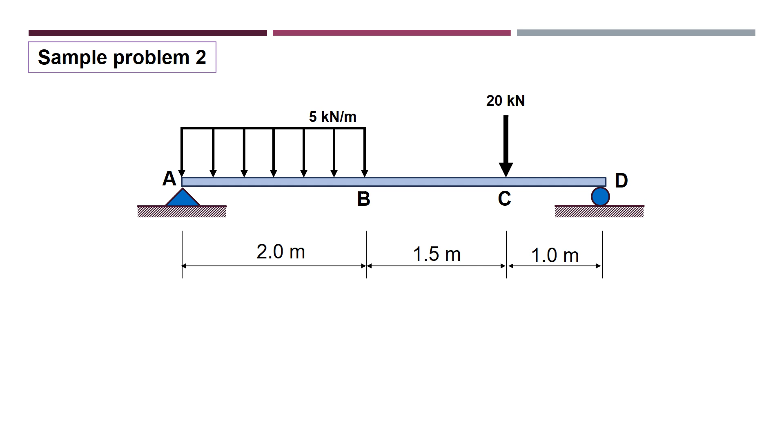So first step is to solve for the reactions at the supports. So kahit walang value yung X component sa hinge support, kailangan papakita pa rin natin yan doon sa pag-solve natin ng reaction. Like for this one, and in our first problem, you have the vertical component ng reaction sa A. Although 0 yung horizontal, sinama pa rin natin dito.

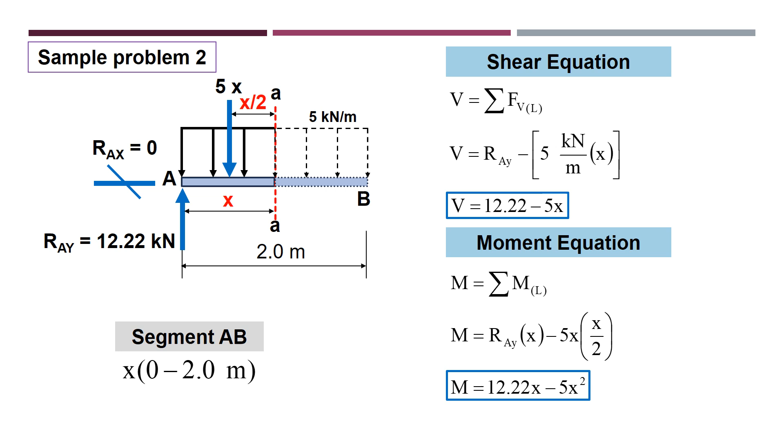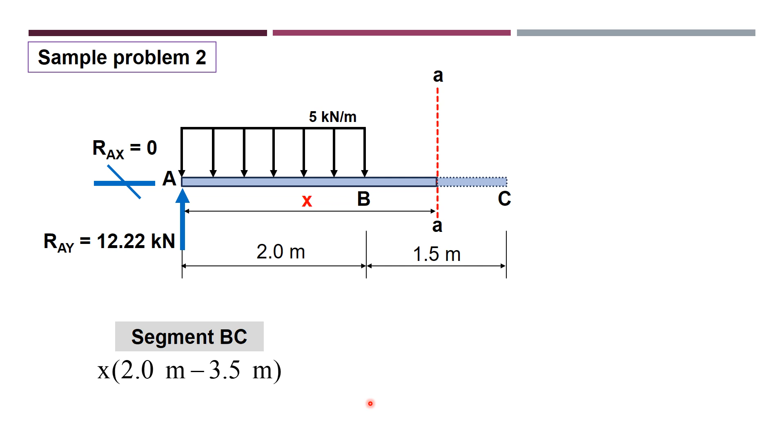So this is again our original beam, and this time sa segment BC naman, we pass an imaginary cutting plane through BC, measure the distance from A. So this is now segment BC, and for segment BC, the limits are from 2.0 meters to 3.5 meters.

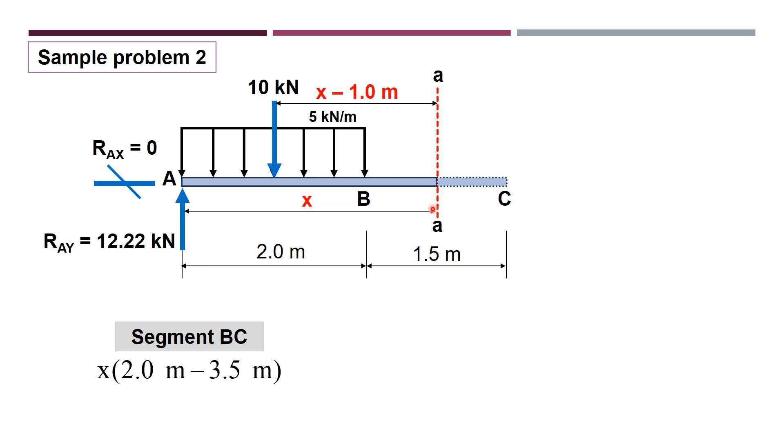So how did we get this one? Since this is a rectangular loading, ang centroid nito ay midway lang or nasa gitna. Or if this is 2 meters, it is 1 meter from A and 1 meter from B. And since what we need is the distance from this centroid up to the imaginary cutting plane, that would be x minus 1 meter.

For the shear equation, we'll sum up the vertical forces to the left of the imaginary cutting plane. Again, the vertical forces involved are RAY and the 10 kilonewton force. And simplifying, our shear equation for BC is V equals 2.22.

And for the moment equation, the forces that will rotate about this point will be the RAY, or the vertical component of the reaction at A, and the 10 kilonewton force. And these are their moment arms. So yung summation of moments to the left of the imaginary cutting plane, we will have

12.22 kilonewtons in clockwise direction with moment arm of x, and 10 kilonewtons will rotate in counterclockwise direction, so that's minus 10 multiplied by its moment arm of x minus 1. If we simplify this equation, we will have the moment equation for BC: M equals 2.22x plus 10.

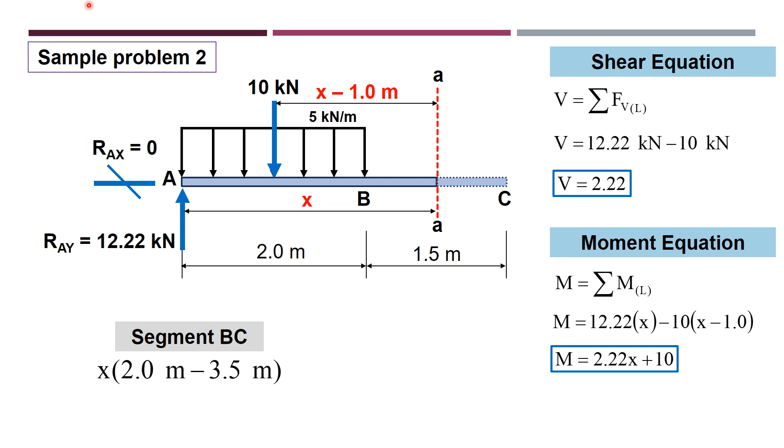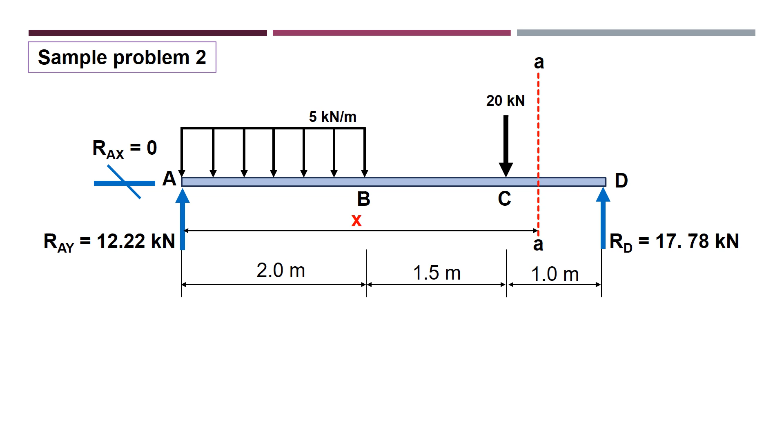And for segment CD, pass an imaginary cutting plane, measure that from A. This is now our FBD for CD, considering the left side of the cutting plane. Our limit now is 3.5 to 4.5. Again, uniformly distributed load ito, you need to get the equivalent single force or the resultant by multiplying 5 kilonewtons per meter by 2 meters, and it is located at 1 meter from either side of this segment.

So these will be the forces na nasakop ng x. We have RAY, we have this equivalent single force nitong distributed load, and the 20 kilonewton force. So tatlo na yung vertical forces. When you sum up, 12.22 minus 10 minus 20, or V equals negative 17.78 kilonewtons for the shear equation for CD.

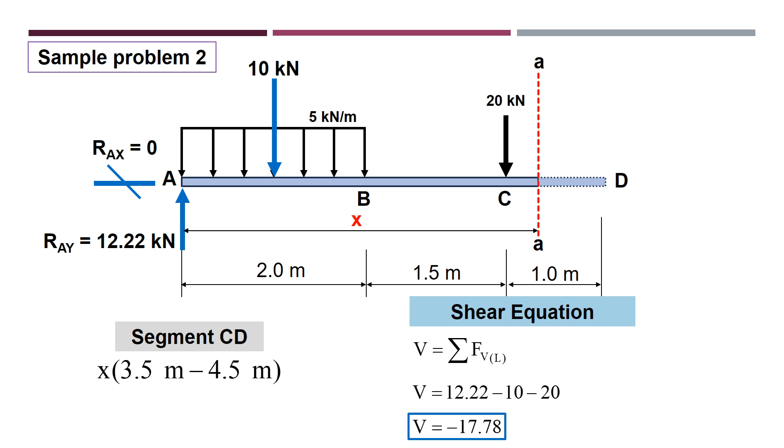And for the moment equation, of course, you need the distances of the other forces kasi ito may distance x na yan. So for 10 kilonewton, since this is 1 meter from A, at ang kailangan mo ay distance to the imaginary cutting plane, that will be x minus 1. And for the 20 kilonewton force, we have x minus 3.5 meters.

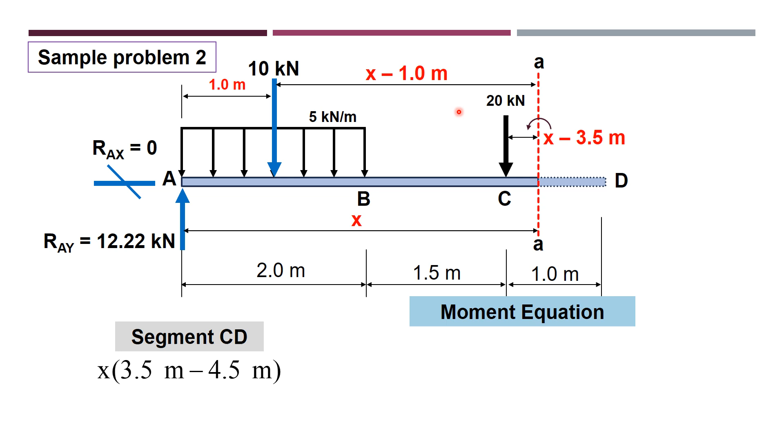So for the moment equation, 12.22 is clockwise with moment arm of x. 10 is counterclockwise with moment arm of x minus 1. And 20 is counterclockwise with moment arm of x minus 3.5. So simplifying this, we have M equals negative 17.78x plus 80.

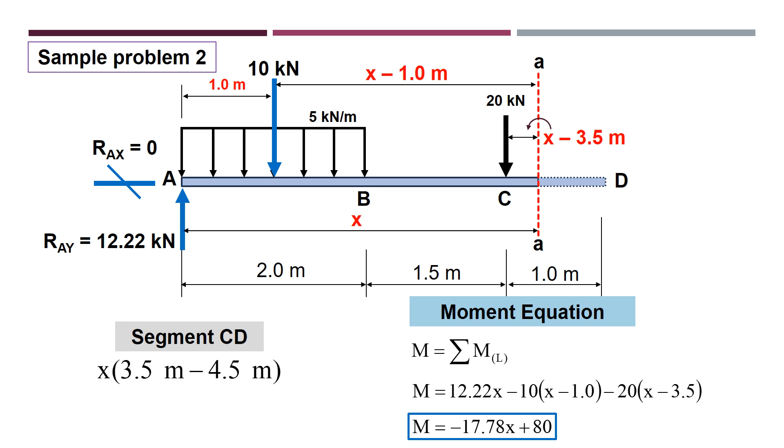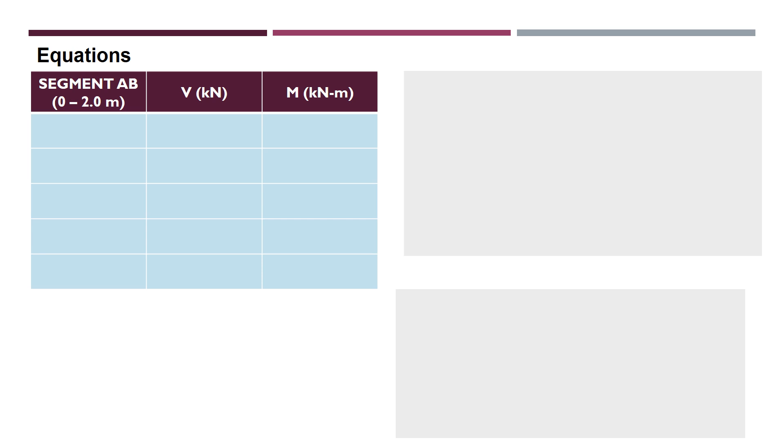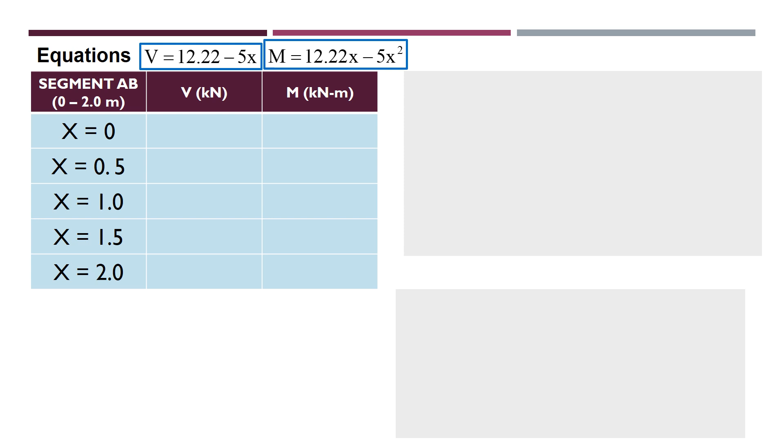So now we are going to substitute the values of x using the shear and moment equations for each segment. Ginamit ko rin ulit ang 0.5 meter increment. So for segment AB na may limit na 0 to 2.0, ang x values start from 0, then 0.5, 1.0, 1.5, and 2.0. Using the shear equation and the moment equation, find the values for the corresponding x. So these are the values for the shear and the moment.

Hindi ko na diniscuss isa-isa kasi alam ko naman na nakukuha nyo na yung procedure or yung technique kung paano natin makuha ang shear and moment values at each point considering the distance x. You will just have to substitute the value of x sa shear equation and moment equation para makuha natin lahat itong values na ito.

The same for segment BC na ang limit ay from 2.0 meters to 3.5 meters. And with this equation, these are the shear and moment values. Since dito sa shear equation natin walang variable x para mag-substitute tayo ng x distance, the shear values are the same at these points in segment BC na may distance na x equals 2.0 or 2.5, etc. While for the moment, since may x variable tayo dito, pwede tayo mag-substitute ng values na ito for the corresponding moment values.

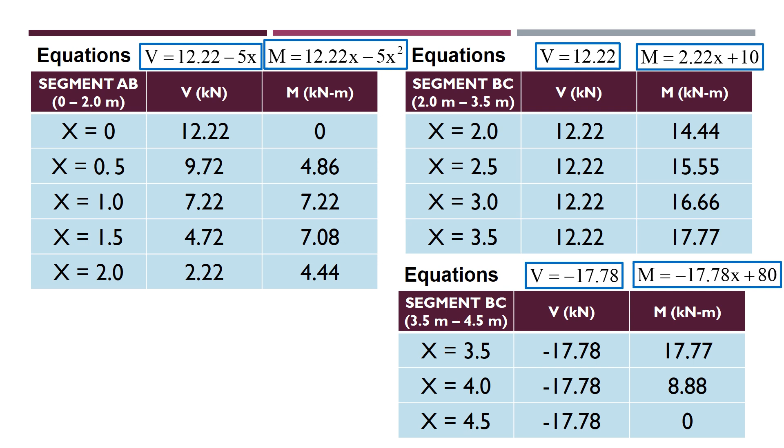So this is now our beam. What you will do when plotting the values, you draw a line parallel to the beam, one for the shear diagram and the other one for the moment. Dito nasabay ko lang na mailagay, pero you can do it na gawin mo muna yung shear diagram bago ka gumawa ng isa pang line para sa moment.

And also, using the increments of 0.5 ay discretion ko lang yon, but you can use other increments, like for every 0.2 meter, although masyado ng maraming points ang magagawa mo dito. Later on, hindi na tayo gagamit ng mga increments, kundi we will just get the values of shear and moment from end to end ng segment na mas mabilis, basta susundin lang natin yung guidelines. I will give the guidelines later in another video.

So for the shear diagram, again, ito yung points with 0.5 meter increment. Let us now plot the values na nakuha natin.

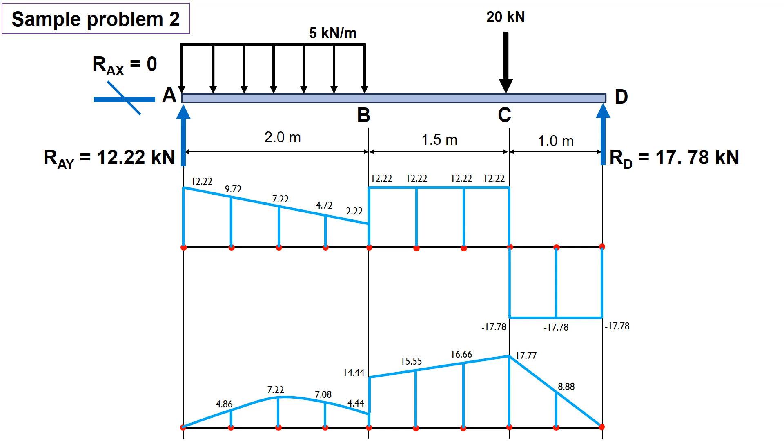While for segment BC, we still have a straight line, kasi pare-parehas yung difference between two consecutive values. And for segment CD, it's the same. Ang difference ay 17.77 minus 8.88, or 8.89. So parehas din, so we will have a straight line. So this is now the shaded shear and moment diagrams. Based on the values, the maximum shear is 17.78 kilonewton. Again, when getting the maximum value, whether positive or negative, you get the absolute value, and the same for the moment. Dito nagkataon, lahat ng moment values ay positive.

Now in the next problems wherein we will draw the shear and moment diagrams, we will not use the increments anymore. Although we will still formulate the shear and moment equations, ang kunin na lang natin ay yung values from end to end of each segment. And there will be some guidelines kung paano natin ipa-plot ang bawat diagram. Yung bawat line na ito ay merong degree. Like this one is a straight line, pagdating dito, naging curved line na. May sinusunod tayo na degree kung ano ang magiging itsura ng diagram, kung straight line or curved line, and if curved, is it concave upward or concave downward.